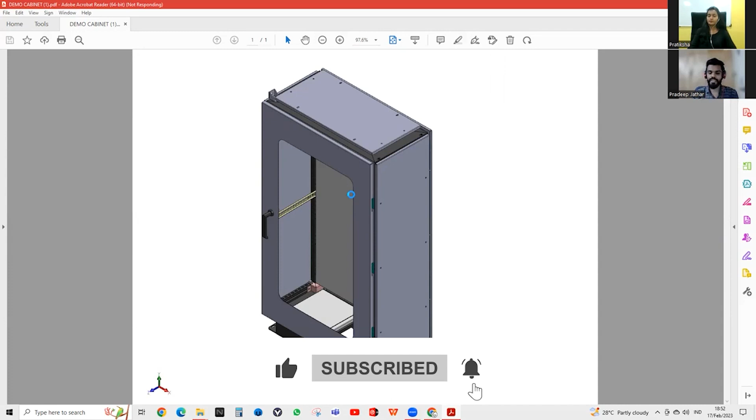So you have, let's say, X dimension in the X direction, or Y, and we had to limit that design to that particular space only. So the project was to fit that cabinet in that limited space, considering the standards. If I mention the standard, I mean the IP standard.

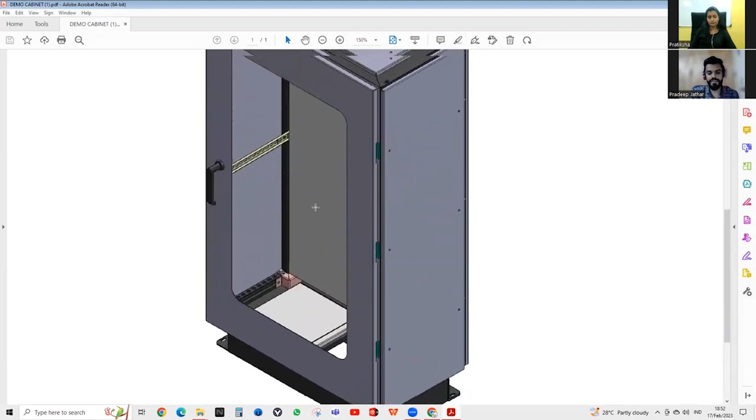IP means ingress protection standard. Ingress means any dust or liquid particle or water entering the cabinet, so we had to take care of that. In short, we had to make this panel waterproof. This was the chassis plate on which all electrical components will be mounted, and the cutout you see is where the glass and displays will be mounted, so you can read readings from inside the panel.

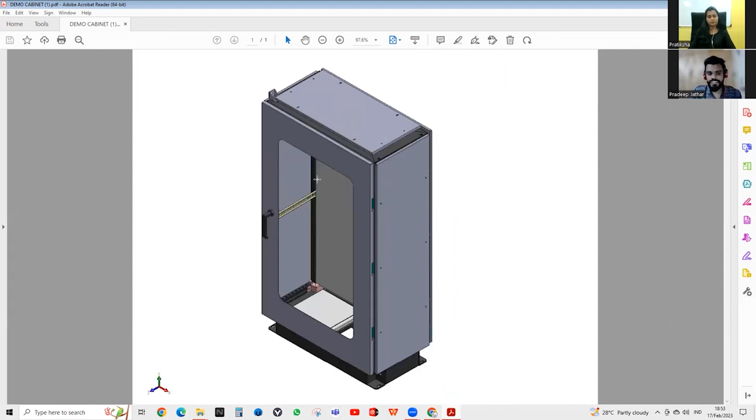So this was the conceptual drawing we had done in SolidWorks at that time. I had another example too.

So you did this with IP standards? Yes, IP standards. The IP rating was IP64. IP means ingress protection; six means total dust protection, meaning dust will not enter the cabinet.

And the four in IP64 means splash water protection - if you spill a glass of water on the table, or rainwater, it will not enter the cabinet. If we say IP67, the seven means totally waterproof - if you dip this panel in a swimming pool or the sea up to 1 meter, water will not enter for 30 minutes or an hour.

Oh, that's how that thing works.

This was one DCS panel we designed for a sugar industry project we worked on. This was also the proposed drawing. It's not a final drawing, so I can share it with you, because the final ones are intellectual property of the company that we can't share with anyone. But this conceptual drawing we can share. That's why I have this with me.

This was its base, and it had some computers and monitors mounted on this surface. It also had a workstation and other things mounted inside these doors, along with a keyboard and mouse drawer. It was a two-door design.

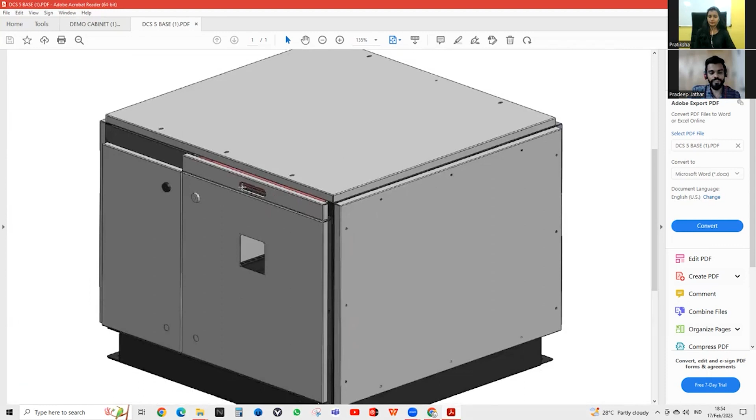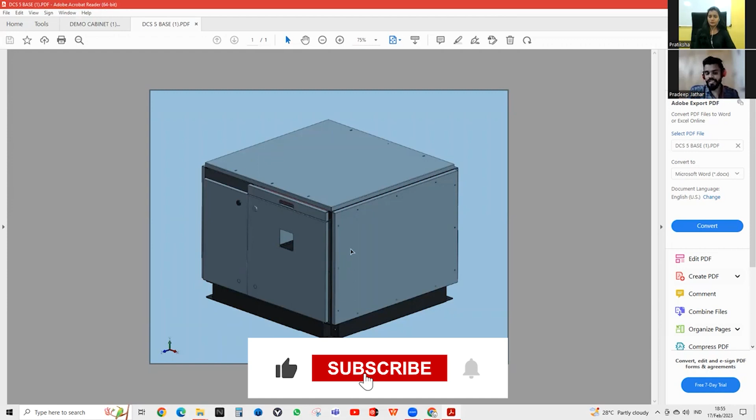This conceptual drawing was done in SolidWorks. For production, we consider each part separately, and that gets counted under the bill of materials, BOM, with a separate manufacturing drawing and separate laser cutting, since this is manufactured in sheet metal.

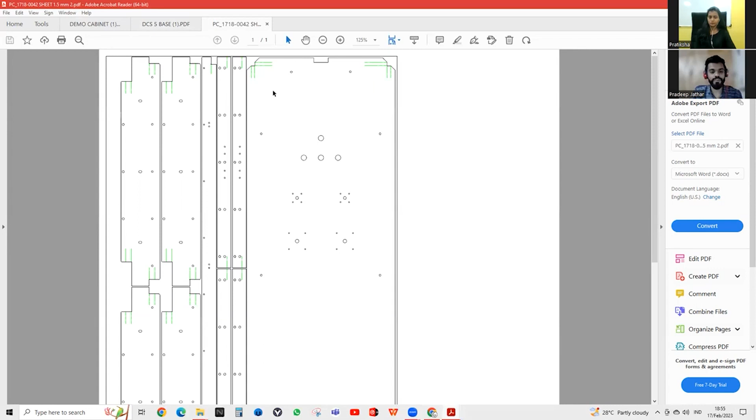This is a bended sheet metal part, and to manufacture it we need to create its flat patterns. For the patterns, we have to create nesting drawings. Nesting means arranging those flat patterns so we can utilize the full sheet of metal at its most efficient level. These are arranged nicely to fully use the sheet, let's say a 1.5mm thick sheet.

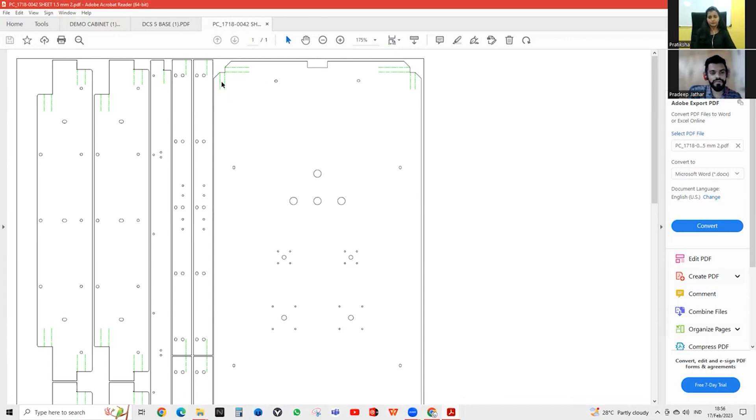This way we give the drawing to the clients, and they can laser cut it and bend it along these green highlighted bend lines. This is the information I had with me to share with you. This was done in AutoCAD, and the other one was done in SolidWorks.

Very nice project, sir. So you mentioned you follow IP standards, the Ingress Protection standard. Where did you get this information that IP64 means dust won't enter, and how do you follow these standards?

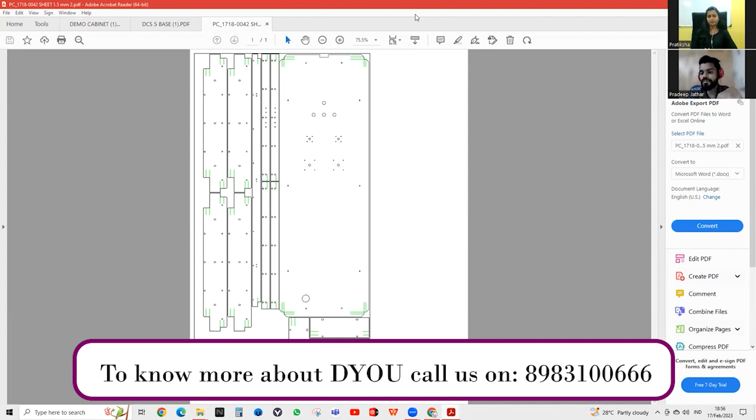While a client requests some information or certification, we need to go through particulars. Let's say IP64 - you search what IP64 means. Google tells you IP means Ingress Protection, and what six means and what four means. There are lots of resources available in the market that you just need to grab. And if that information isn't enough, you can always reach experts and seek advice from industry-level experts.

At that time, I had no idea how to nest this or how to produce it. So I visited our client who was helping us in manufacturing, and I asked for all the information needed to produce this part efficiently with 100% accuracy. I gathered input and feedback from the client, and that way the project was very successful. So we have to gather information we don't have and utilize information we have. That's how things worked, at least for me.

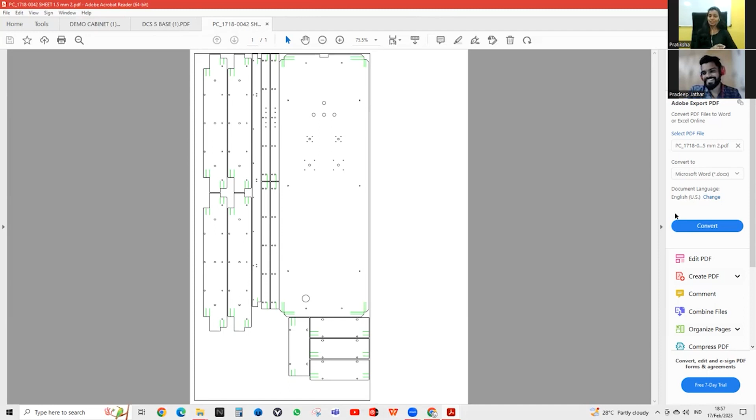Okay, one more question regarding these standards. I saw your LinkedIn profile, and it mentioned experience in design and drafting as per ASME standards and other standards as well. I want to know what ASME standards are.

In short, ASME is the American Society of Mechanical Engineers. Some students wonder why industry focuses on these standards. Let's say I want to manufacture a part - I have the design but no manufacturing facility, so we need to convey this information to another person, and there are standards for how to do that. ASME is a panel of highly experienced professionals with at least 40 or 50 years of experience in industry, giving guidelines on how instructions can be conveyed to another person in a standard way.

For example, ASME Y14.5 is the GD&T standard - the recent edition is 2018. It gives information about what GD&T symbols should be given on the drawing, so the manufactured part can be made within acceptable limits and tolerance zones, meeting functional requirements, and so the parts easily assemble in our assembly.

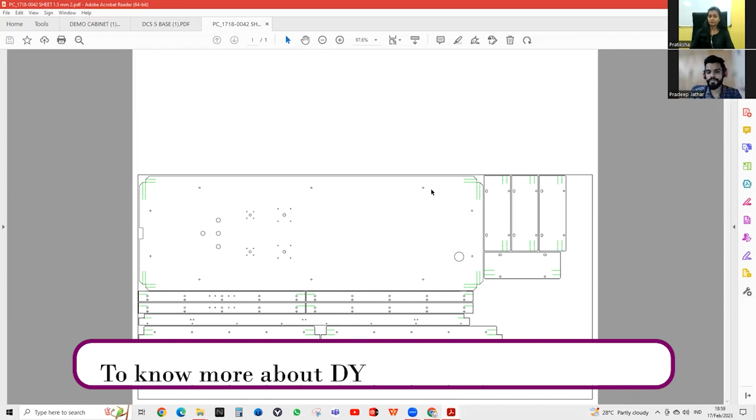So this information or those standards are created by ASME committees and panel members. Let me give one example. There are standards for every industry: piping industry, manufacturing industry, forging industry, casting industry, plastic industry. If safety and environmental impact are concerned, safety standards should be there, so those agencies come into picture.

There are other standards also: national pipe thread, British standards for pipe threads, and we even have the international standard organization, ISO standard. So that way you might have heard a lot of times about those standards.

So those standards are necessary to make the process standardized, to produce those services in very less time, in an efficient manner, to reduce a lot of waste and have less impact on the environment. That is the goal of those standards. That's how those standards and industries work.

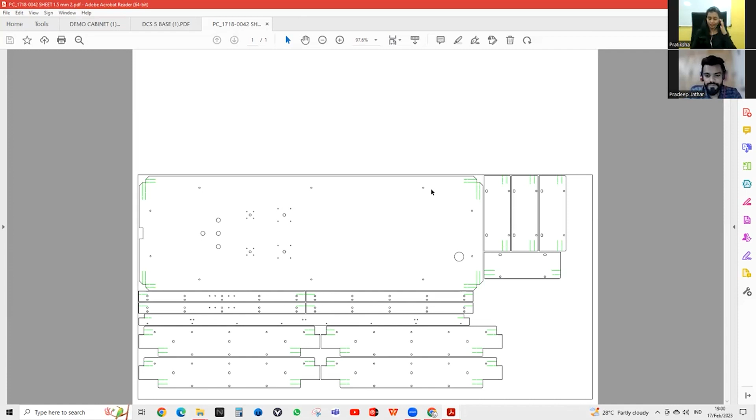Okay, okay. So now I got your point about what ASME standards and IP standards are. Thank you so much for giving this information to me and our students. So I want to know what difficulties you faced while dealing with your freshers.

While dealing with your juniors - yeah, we got opportunity to train our juniors, the freshers joining the organization. Even though I got very few opportunities, I was fortunate enough to be part of the lesson-learned coordinator role in my last organization. What does lesson-learned coordinator mean?

I was having the responsibility to record all the lessons. Let's say you are my teammate and you have learned something new today. Your job is to record this learning and spread it with your team members, so that similar learning can be used by me or other team members, and mistakes can be totally avoided. This learning will be helpful for me in doing my job if I am facing a similar kind of problem in my daily activities.

So I was fortunate enough to get those opportunities to work with that. As far as dealing with freshers is concerned, a fresher is just a new candidate having technical and theoretical knowledge and the practicals they have performed in college. So I would say their limitations are very limited - they have to use their technical expertise and grasp knowledge from the experienced people around them.